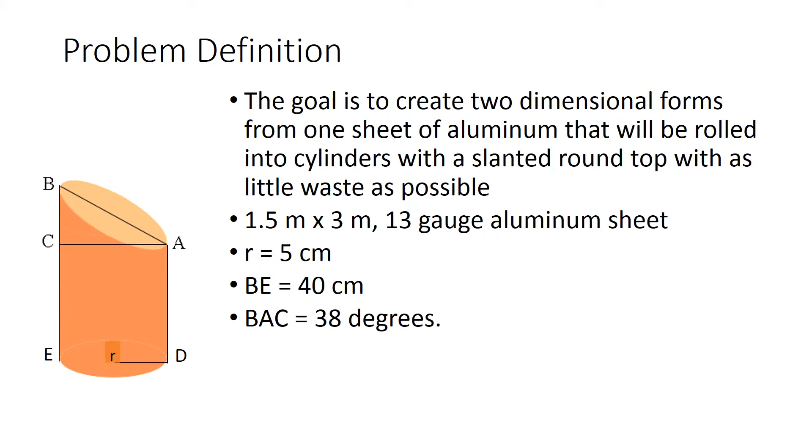Our design is to have as little waste as possible, and the scrap left over from the sheet using our design is 4,250.9 centimeters squared, which is less than 10% of the entire sheet. In order to create an ellipse, which is the shape created when a cylinder is sheared off at an angle, we will be using a sinusoidal wave.

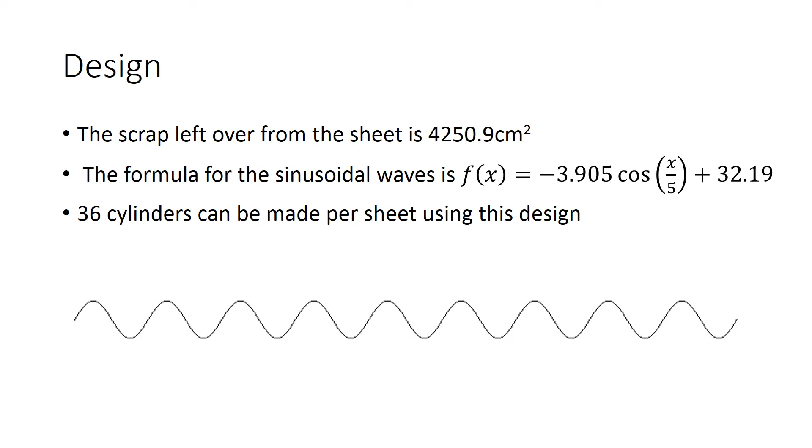The formula in order to create a sinusoidal wave on the sheet is f(x) = -3.905 cos(x/5) + 32.19. In this formula, x is the distance from the leftmost point on the sheet, and f(x) is the vertical distance from the bottom of the sheet. 36 total cylinders can be made per aluminum sheet using our design.

The first step in using our design is to shear the scrap from the aluminum sheet. The scrap is noted by the diagonal lines crossing through the small areas at the top and right of the aluminum sheet. Next, cut the remaining aluminum sheet in half horizontally, creating two aluminum sheets. Next, you will blank the final pieces from the remaining sheets.

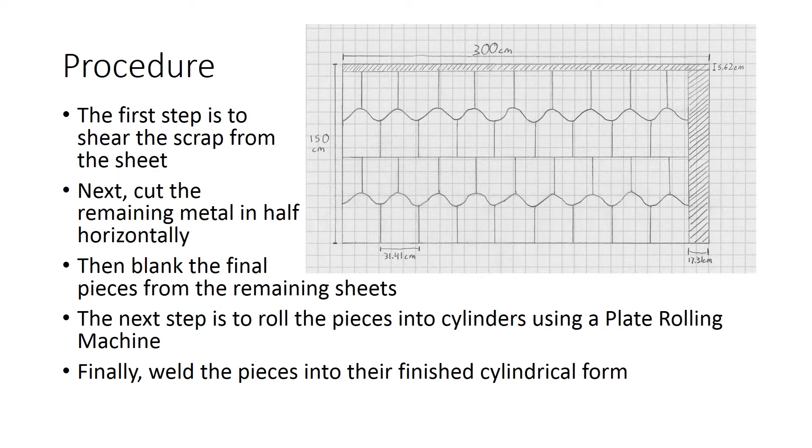The next step is to roll the pieces into a cylindrical shape using a plate rolling machine. Finally, weld the pieces into their finished cylindrical form, creating the cylinders as shown earlier. Shearing is a process used to cut sheet metal in straight lines using a machine known as a power shear.

A power shear consists of two things: a lower blade, also known as a die, and an upper blade, also known as a punch. Sheet metal is placed onto the die. Then, a hydraulic force is used to lower the punch. This will create a shearing force on the sheet metal, cutting it into two pieces. Blanking is a similar process.

However, when blanking, the die and punch are both cut into the shape you desire to end your sheet metal with. This way, when the hydraulic force lowers the punch, the blank cut out of the sheet metal is in exactly the shape desired. Both shearing and blanking provide a slight misshapen edge, shown below. The different sections of this misshapen edge are known as the die roll, the fracture, and the burr.

This edge provides a slight margin of error when shearing and blanking. This margin of error, or tolerance, when shearing, is 0.25 centimeters, or 1/4 of a centimeter. When blanking, it is less than 1/400th of a centimeter.

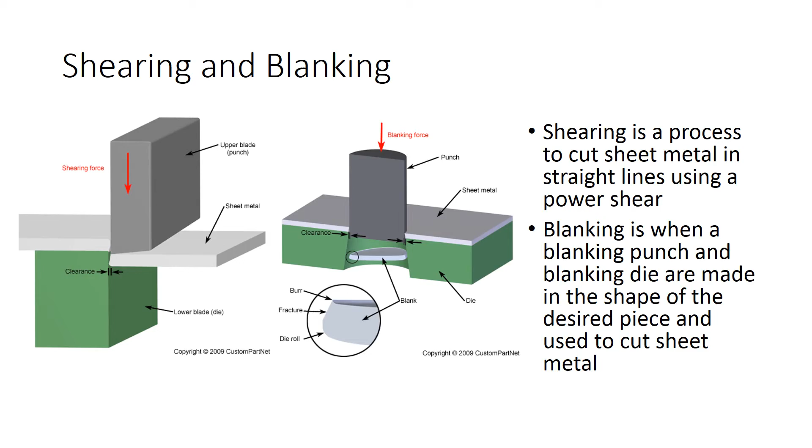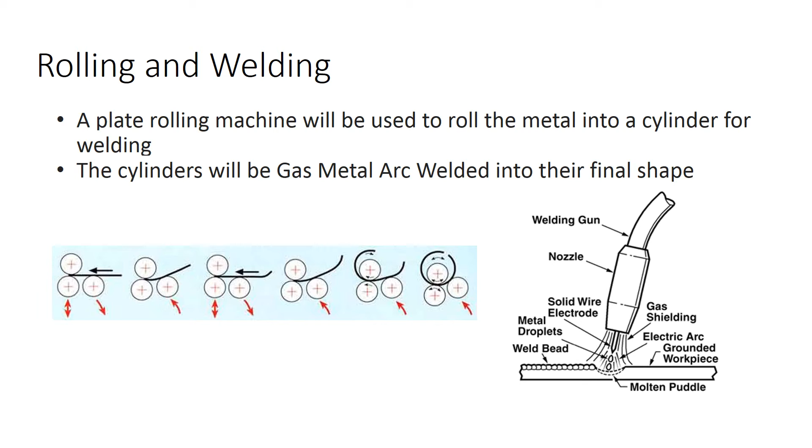A plate rolling machine will be used to roll the metal into a cylinder for welding. This 3-roll bender works by pinching the metal between 2 rolls and curving it as it comes into contact with a back-forming roll. This will form it into a perfect cylinder. These cylinders will then be gas metal arc welded. Gas metal arc welding is when an electric arc is formed between a consumable wire electrode and the metal desired to be welded. This electric arc will heat the metal, melting it and joining it together.

The evaluation of our design involves a 1/10 scale prototype drawn on a paper template. On the left, you can see the paper template, and on the right, you can see the resulting cylinder when the shapes on the paper template were cut out, rolled, and taped together. As you can see, the resulting cylinders were almost exactly 1 centimeter in diameter.

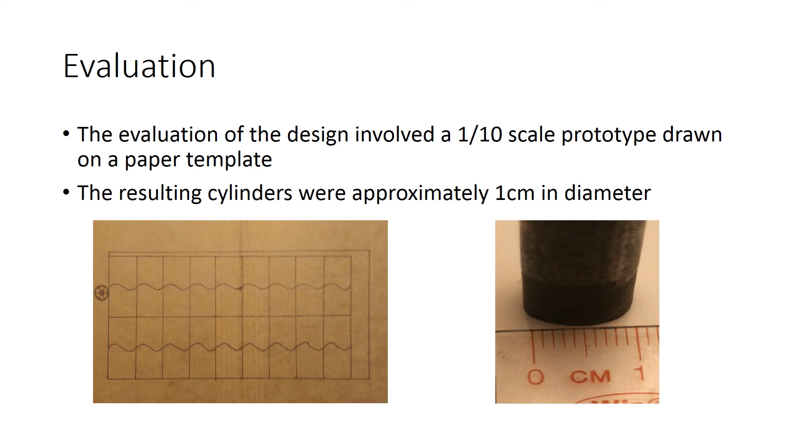Our prototype found that the total waste was approximately 44 centimeters squared. This agrees with our waste in our design. The design we created creates 36 cylinders from a single 15 centimeter by 30 centimeter sheet.